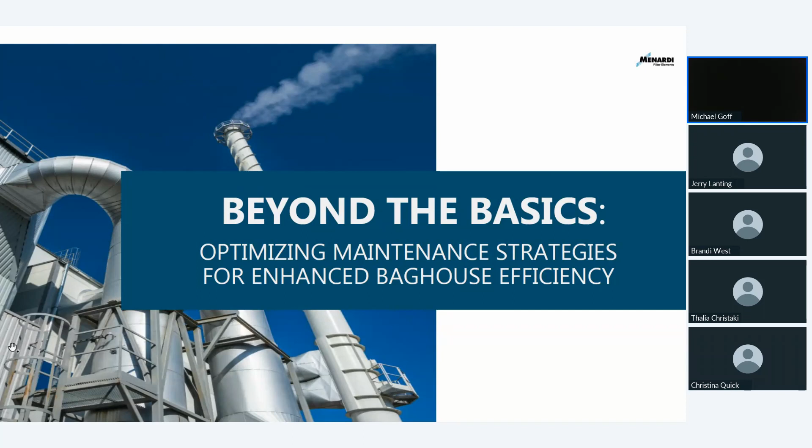Our goal is to give you some of our ideas surrounding maintenance, design, troubleshooting, and strategies that you're able to take back and use every day to help you, A, understand your systems better, B, the role of preventive or predictive maintenance, how those things differ, different troubleshooting strategies and documents to help you take watch of that, and just overall to make things more predictable for you.

We'll spend some time going over this type of content through the slide presentation and some pictures, and then we'll round this out with some of Jerry's case studies that highlight some real-world applications of some of the things we're going to be talking about. So with that, I'm going to turn it over to Mr. Jerry. Thank you.

Hey, thanks, Michael. Like Michael said, my name is Jerry Lanting. I'm one of the senior regional sales managers with Menardi. This webinar is called Beyond the Basics, but I don't think we can really talk about things beyond the basics without at least touching base on some of the basic parts of the baghouse and filters and things like that. So I just want to run through these, take a few minutes and go over some of them.

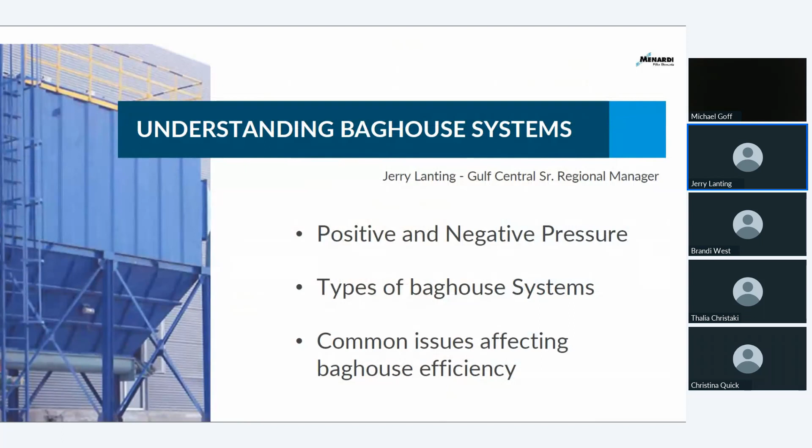The first and the least common when it comes to the fan is your positive pressure baghouse. This is a baghouse where your fan is on the clean side or the dirty side of the baghouse, somewhere between your pickup points and the baghouse, somewhere in the ductwork. It pulls the air from the pickup points and then forces it through the bags, through the filters, and out the stack.

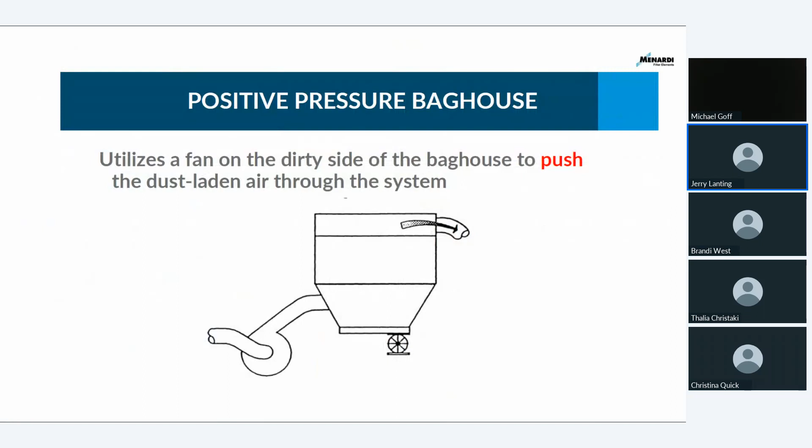The next one is the negative pressure baghouse. This is the most common. This is what I've seen out in the field probably 95% of the time, actually probably more than that. It's where the fan is on the clean side of the baghouse. It is drawing air, pulling air all the way from the pickup points to the baghouse, through the filters, out the inlet, out the outlet, and then pushes it through the stack.

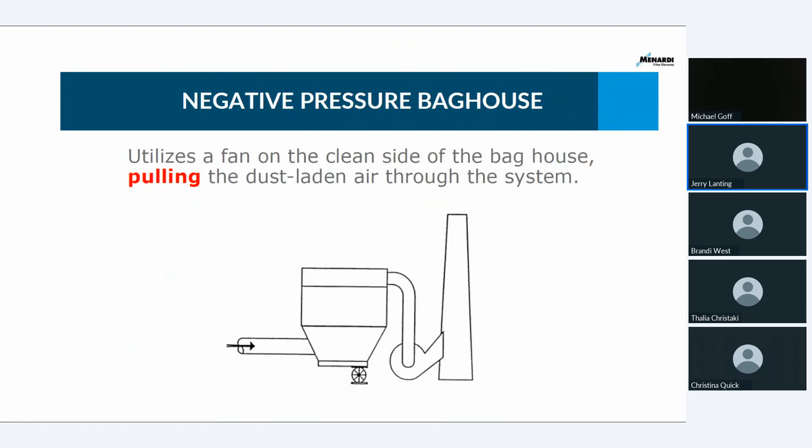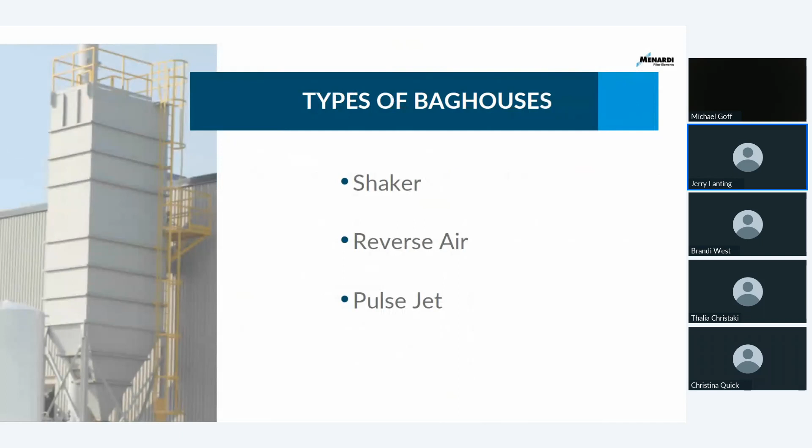Christy mentioned earlier that we're going to have a few polling questions throughout this webinar. The first one is: what type of baghouse or baghouses do you have at your plant? If y'all can answer that, it helps us get more information from you and how we can better serve you. But as you're answering that, let's talk about the three types of baghouses.

Each of those baghouses is named after the way that they clean. The first one is a shaker baghouse, not very common. It's an older style as far as large shaker baghouses go. You do still see some newer shaker baghouses, but it's really in the oil and gas industries or little bin vents, with 15 to 48 filters per each one, just small.

As far as the large collectors, shaker baghouses are old technology, and you just don't see much of them out there anymore. But just a little bit about these: the inlet gas comes in either in the hopper. Your tube sheet is low. The bags are attached to the tube sheet at the bottom, just above the hopper, and hang from the top. The inside of the bag is your dirty side, and the outside is your clean side. You isolate the compartments, and it shakes. The bags relax, they shake. Dirt falls down to the hopper, gets evacuated out of the hopper, then it comes back online.

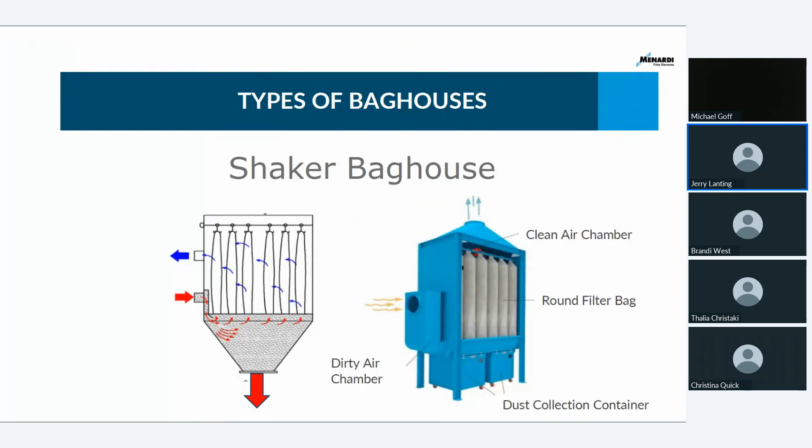The next one is a reverse air baghouse. Same concept as far as tube sheet low. The dirt comes inside, so the dirty side is the inside, the clean side is the outside. It's the exact same structure as the shaker baghouse, with the exception that it cleans differently. You still isolate the compartment, dampers close, bags relax for a moment. The reverse air fan comes on, the bags suck in, and then relax again. The product falls down to the hopper, it comes back online, and then you're good to go.

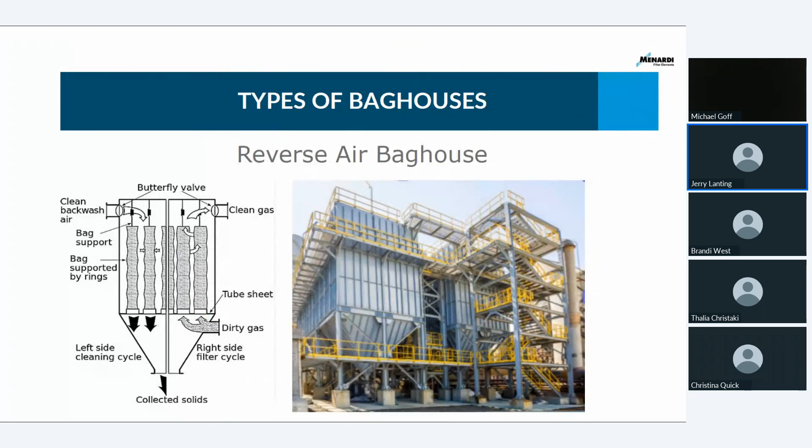The next one is the pulse jet. Now, the reverse air and the shaker are still old technology. You don't see those anymore. Nobody's going to go out and buy and build a new reverse air baghouse. They're all going to be pulse jets. The reason being is the shaker and the reverse air all have to go offline to clean. The pulse jet baghouse is the baghouse where you don't have to do that. It's continuous cleaning. It cleans while it's running.

So it kind of looks the same sometimes. You have the dirty air still coming in at the hopper, comes up, but the tube sheet's up high and the bags hang low, and the outside of the bag is your dirty side and the inside is the clean side. These are cleaned with compressed air, usually blow tubes above each of the holes of the filters, pulsing air. There are some different styles, like a plenum pulse, where it's one big push of air through there, but the bags themselves are being cleaned with compressed air.

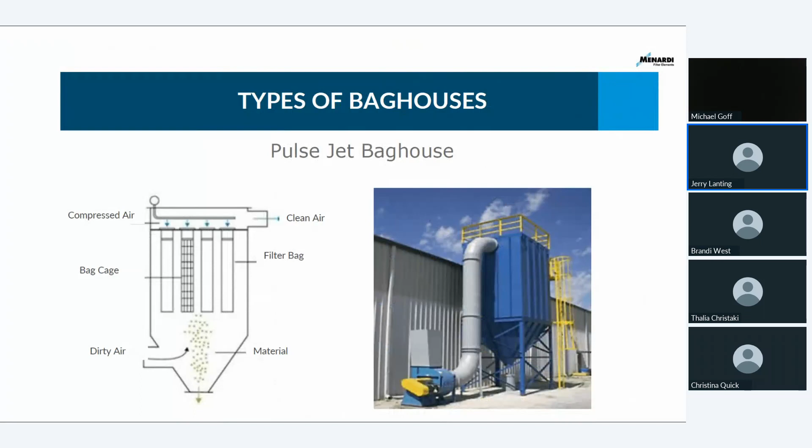So those are the three different types. Again, they're all named by how they're cleaned. Common issues affecting efficiency: there are so many different things that cause your baghouse not to run or work properly, or cause premature bag failure. You see this picture right here where you see some broken wires on a cage. A broken wire on a cage is not your friend.

As your bags are being cleaned, as it pulses, that bag expands, that filter expands and contracts. And what is it going to do? It's going to rub on that broken wire. It's going to cause a hole. You get a hole in your bag. You start introducing product onto the clean side of your tube sheet, and then it pushes product onto the inside of other bags surrounding that. Before you know it, you have an entire compartment or baghouse with compromised bags.

So these are things to look for, such as motor failure. The other one is that center picture - there's a lot going on with this. You have either some abrasion going on, and you're busting out the bottom. There's a lot of different things that could cause abrasions, or it could be heat related. You see the bags where the media is kind of folded up - that's usually a sign of heat. So are you using the correct bag in your baghouse?

These are all things that we can help you with as we're out in the field. Also, the other slide shows cracks in your ductwork. If your plant is in an area where you have high moisture content, those things are not your friend. Your fan is going to pull that moisture in, and we've got some case studies where I'm going to talk a little bit about that in a little while - real life things that we were able to see.

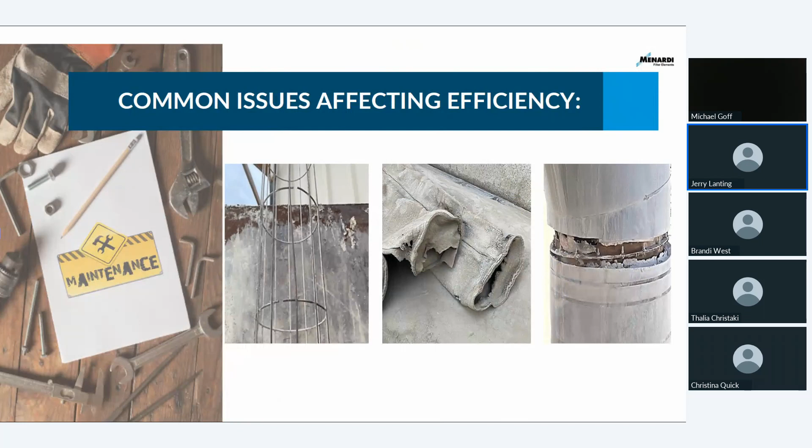Door seals again. If your doors are not sealed on your bag houses, especially if you live in an area with a lot of humidity or moisture present, you're going to pull that into your bag house, and it's going to cause premature bag failures.

Holes again. There's another picture with a hole in the ductwork on an inlet coming in. That's sucking moisture right in.

Your equipment, magnehelic gauges or photohelic gauges, or any kind of sensors that are in your bag houses—knowing that those things work and are working properly is key. I tell people all the time, your bag house is only going to run as good as your equipment is, and understanding what you have and what your equipment is supposed to do will give you a better fighting chance on your bags.

Another thing I preach all the time when it comes to some of your older plants out there: when your plant was built 40 years ago, it was designed to do X amount of product per day, per hour, however you want to look at it. Well, as most of y'all know, that number is now 3, 4, 5, 6 times that expectation, but with the same equipment you had—they didn't upgrade it. You're stuck with the equipment that you have. So understanding all the parts of your equipment, all the working things of it, to give you max output and performance out of your bag house is very, very important.

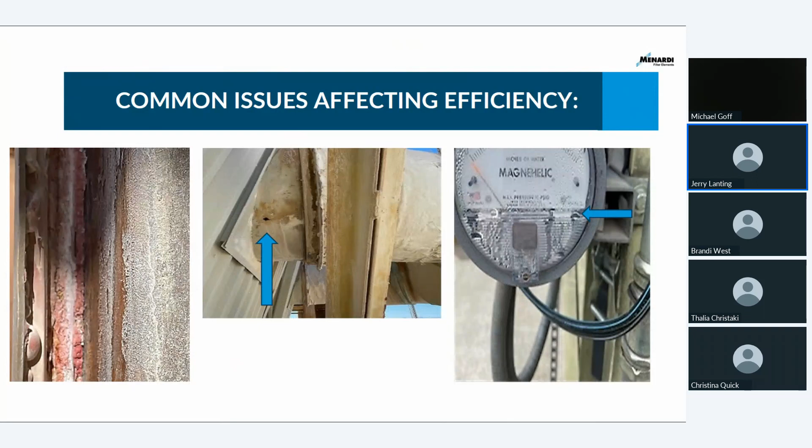Preventive maintenance practices, guys. There's a lot of charts and documentation you can do—regular inspections and cleaning, and the importance of proper documentation.

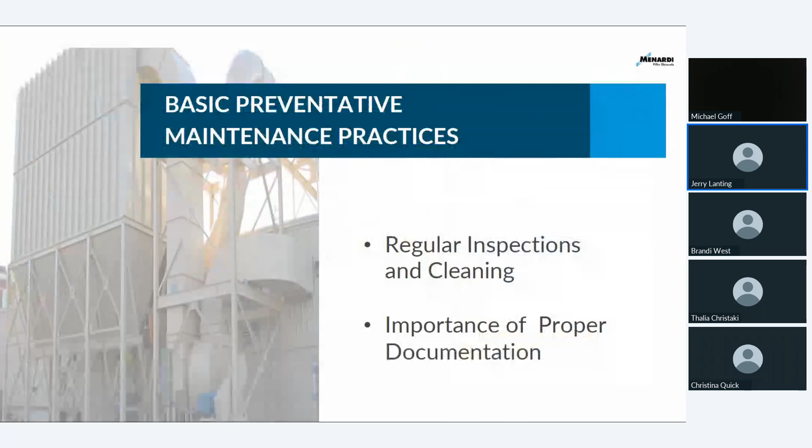So these are some of the checklists that we have, our recommendations. I tell people all the time, I can give you these recommendations and share these things with you, but you need to take what we recommend and apply it to what your plant needs, because everybody's different. Everybody needs to look at different things, but these are just kind of general rules.

So you've got daily inspections—walking through the baghouse area, checking for normal and abnormal visual and audible sounds. That's a crucial thing, right? Knowing and understanding what a failed diaphragm sounds like. If you know what that sounds like as you're walking through the plant, you may be headed to the opposite side, but you walk by a baghouse and hear that sound, you call someone on the radio and say, hey, this baghouse has a failed diaphragm on your pulsing system, it needs to be changed out. Somebody can get there and change that out, making your baghouse run the way it needs to run.

Check your differential pressure, understanding what that looks like. If differential pressure is climbing and that's abnormal, that means you probably have some failed bags in there somewhere that are plugged up and you're not getting the flow that you need. Checking your cleaning cycle, making sure—there's just a lot of different things.

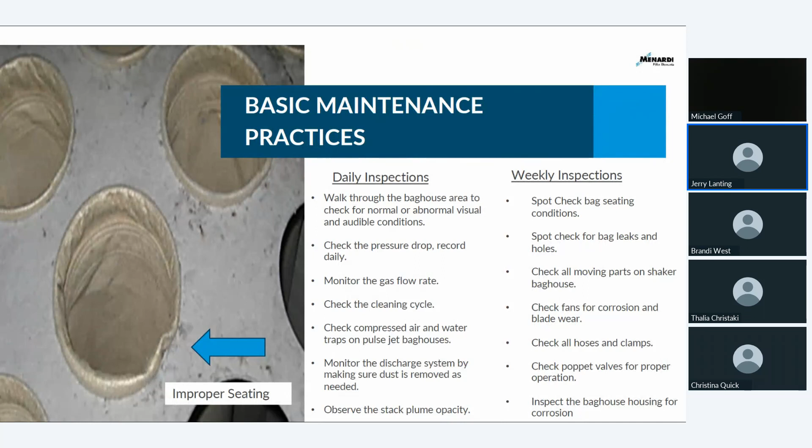Blow out clear magnehelic gauge lines, verify the working order of the temperature-indicating equipment, make sure your temperatures are indicating correctly. That's very important because, as a lot of y'all know, you put in certain media in your bag house based off the conditions of your bag house, and temperature is a big factor.

Check the bag cleaning sequence to make sure those are correct. If you are not sure how your cleaning sequence is supposed to be, let us know. We would be more than happy to come out on site and make sure you are cleaning properly.

And then you've got quarterly inspections: thoroughly inspect all bags, do a leak check if you can, calibrate the opacity monitors. There's a list that goes on and on. Check the rotary airlocks, the screw conveyors, and we're going to talk a little bit about some case studies when it comes to things like that, and why it's important to check those quite often.

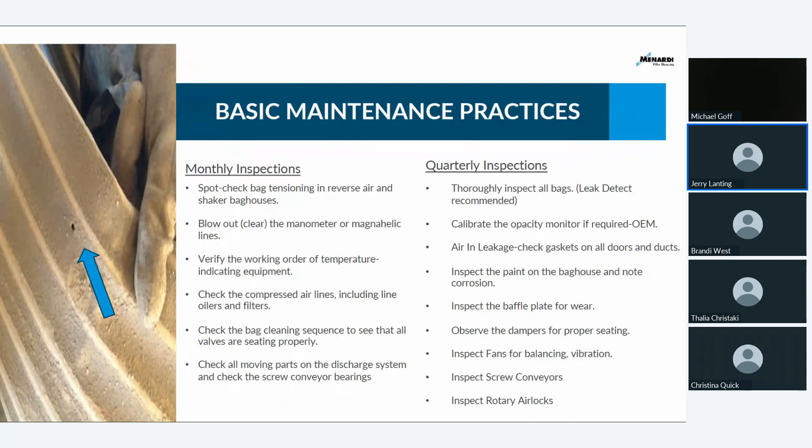And then here's some yearly inspections. These kind of get really deep into the woods, like check the bolts, make sure those are good, check the ducts for dust buildup.

And if you don't want to climb through your duct work to make sure there's buildup, I can send Michael Goff, my manager, out there—he'll climb through your ducts and clean them for you. Just joking. Just check everything for proper wear.

Check your hoppers, make sure those are good. Your sonic horns, make sure those are working correctly. If you are curious what sonic horns are, please reach out to us. We can help explain what sonic horns are and if that could be a good fit for your plant.

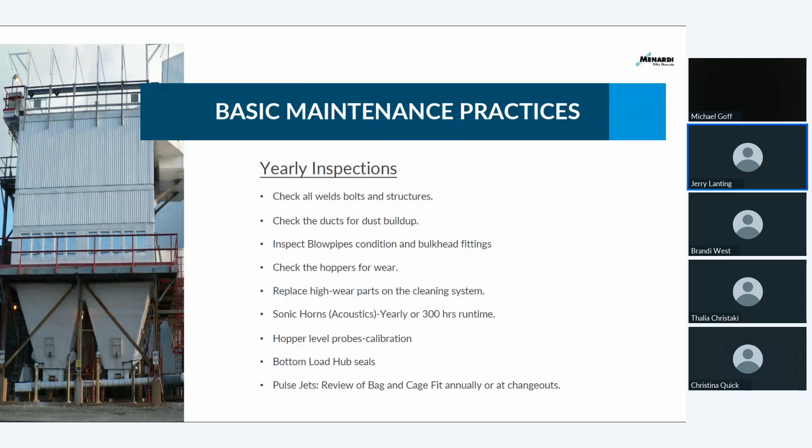So there are several things that we use, documentation forms to help understand what you have and what's been problematic. We have a bag house inspection report that we do when we go on site.

We have a failed bag location chart. That's very important—knowing if you constantly are having bags fail in a compartment, document which ones they are, and that could tell us and tell yourself that you have a problem in this area. If it's random, then it's random, and then we find out what your other mode of failure is.

Then we have what we call our FITS form. These are forms that we use on site to measure bags, cages, pleated filters, whatever your equipment is, so we can make sure we get you the best possible filter that fits correctly in your plant.

We don't just take your word for what it is. A lot of the time we want to get on site, measure a tube sheet, mic the tube sheet hole, make sure that snap band is fitting in there correctly—not necessarily just that it pops in really easy, but that it pops in easy and it seals, so you don't have any bypass and catastrophic failures within your bag house.

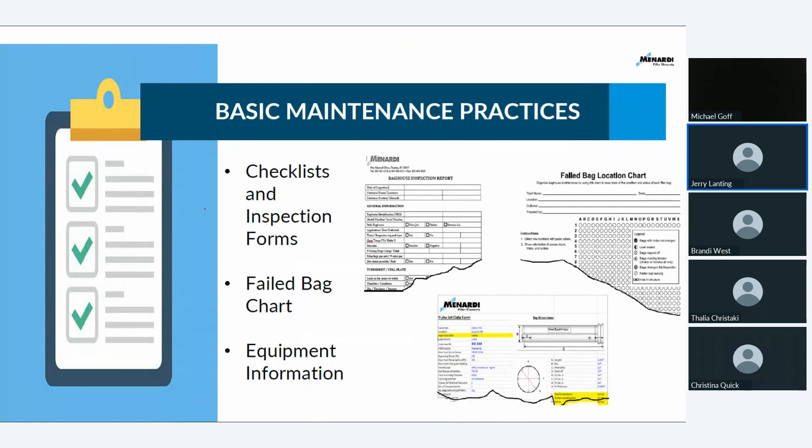So all the checks in the world don't matter if you don't keep track of them. So with that being said, I'm going to turn this back over to Michael, and he's going to talk about some more stuff.

On the heels of all these basic maintenance practices we've been talking about so far this morning, I'll be talking about some more advanced maintenance topics—just quickly covering predictive maintenance, how that might differ from preventative maintenance, equipment upgrades, filter construction, and how empowering your personnel through encouraging ownership and accountability of the equipment may help you with reliability.

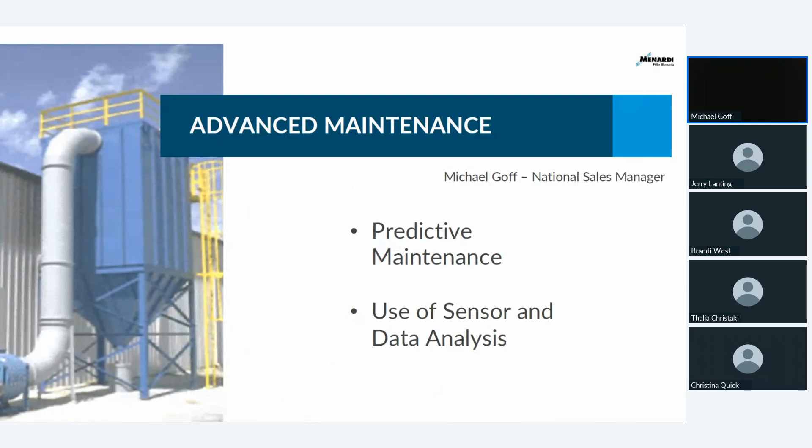On this first slide, we're looking at tension and how that plays a role both from a preventative standpoint and predictive. This is primarily involving reverse air and shaker collectors.

So of note is we expect that tension should change over time. You guys that have reverse air and shaker bag houses know everything there is to know about initial tension requirements when installing these bags, and those of you that have hardware know what that spring load design is, cleaning systems, et cetera. But the tension that changes, and how that changes, will help you determine or predict what that life cycle might be according to those changes.

So when you're looking at the picture on the right, this is a good visual check, assuming the rings are all designed to be in the same place. Crack open the door and see if that ring placement has changed. Fifth bag back from the wall, the rings are 2 inches lower than everybody else—let's go up top and see what the spring looks like.

So these things are going to move, they're designed to move. The predictive side of this is, if we do everything we can from an initial loading standpoint and preventive maintenance, how are those bags that are a little bit less tensioned going to show up in overall bag life?

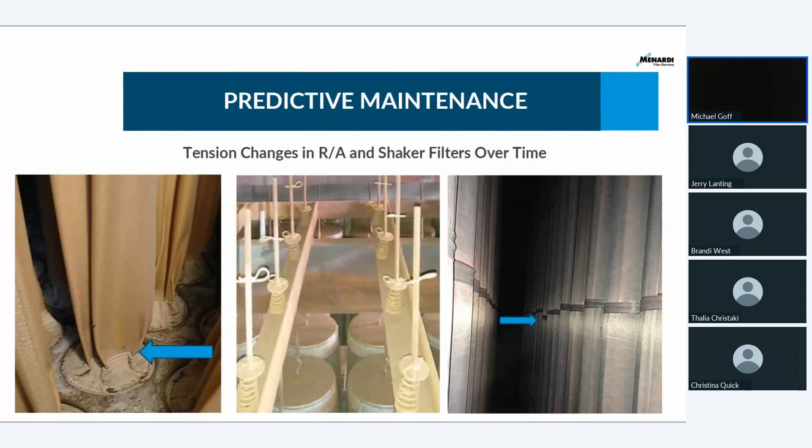Differential pressure. Everybody's got differential pressure, whether it's compartment by compartment or flange to flange on an entire collector. But this is the heartbeat of your system. This tells us how healthy we are. You have to be able to clean if you're going to have a multi-cycle filter system, but more importantly, you have to be able to trust that your instrumentation is giving you the right information.

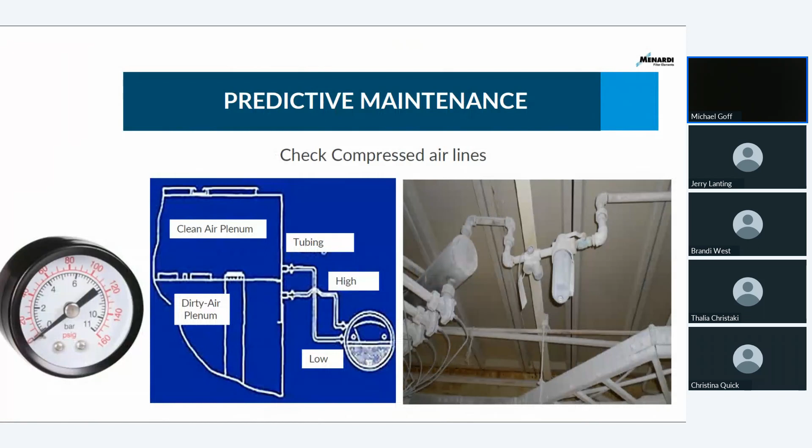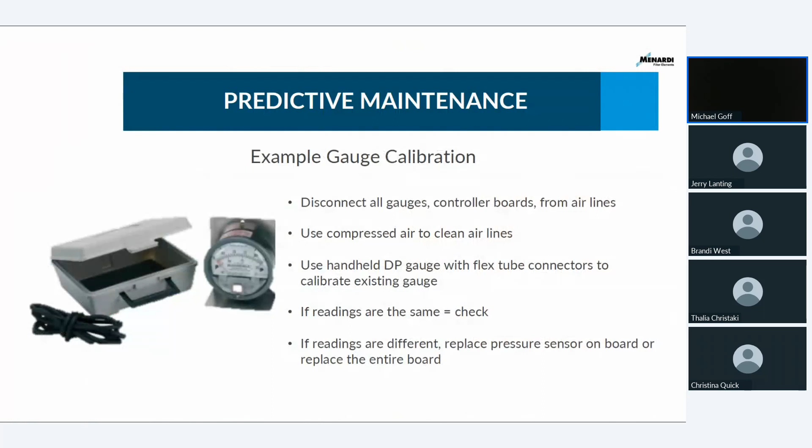So this next slide is going to give you an example of how you might manually calibrate to ensure that what information you're being given is accurate. This would walk you through the process of manually verifying that the information is accurate. It includes cleaning out the airlines and just kind of double checking.

From a predictive maintenance standpoint, again, cleaning on demand versus cleaning on time. I'm not going to go into this a lot because this is in some of Jerry's case studies at the end of this presentation. But I will just mention to pay careful attention to those set points. Where's the high end, the low end, and what is that gap between? Cleaning on demand versus on time is heavily involved in predictive maintenance and total cost of ownership. So those are the reasons that drive somebody to move from continuous cleaning versus clean on demand.

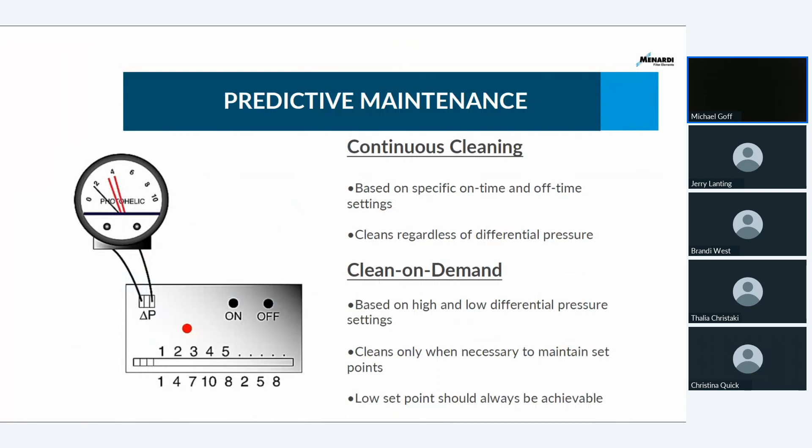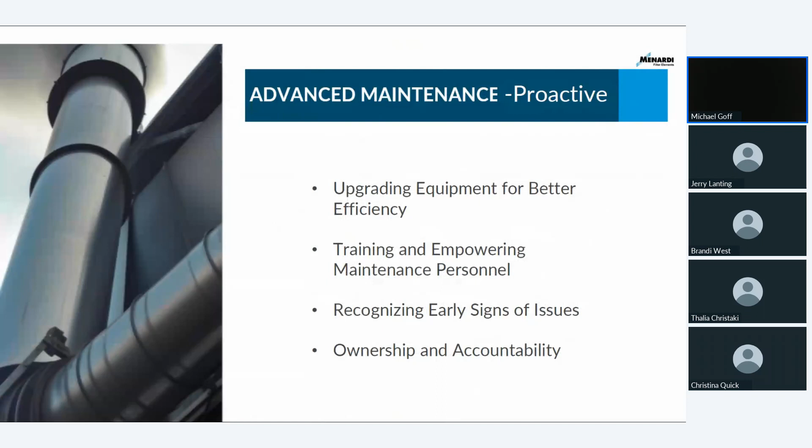All right, this next section, we start talking about equipment changes or filter changes that you might not have considered that may help with your reliability. We'll also talk about those unintended consequences sometimes of upgrades and how empowering your maintenance personnel might help you with reliability as well. And I'm gonna steal a phrase here from Department of Homeland Security: if you see something, say something.

So this next slide is all about equipment upgrades. In some sense, filtration equipment can feel like buying a computer. They used to say that as soon as you bought a computer, it's already out of date. And what you're looking at here was something that was probably cutting edge technology of its time. This is a flat flange seal, and this is just a picture to illustrate there could be a better way to seal this, both from an emission standpoint and a change-out, labor standpoint.

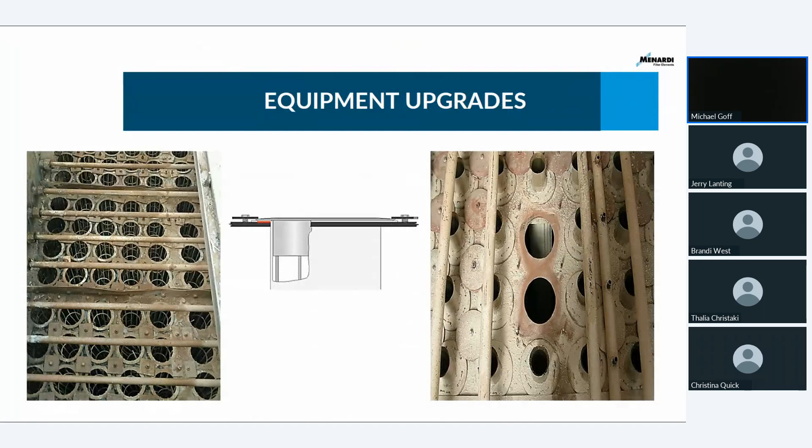These next few slides, we'll talk about filter changes. This first one is a bottom load filter. This dominates the air pollution control industry. Everybody's got a bottom load filter out there somewhere. That's a raw edge bag that you attach to a cage, and then attach that combo to a bottom hub with use of a hose clamp, some type of clamping system. You see the picture there to the left. If the bag is either not sized properly, or it's a heavy bag material, sometimes you can get some pinch points in there that can cause some emission issues. So a potential filter upgrade to help combat that is what we call a soft seal, where that top section that is meant to tuck into the cage is made from a little bit different material to help you create a better seal when you attach it to the hub.

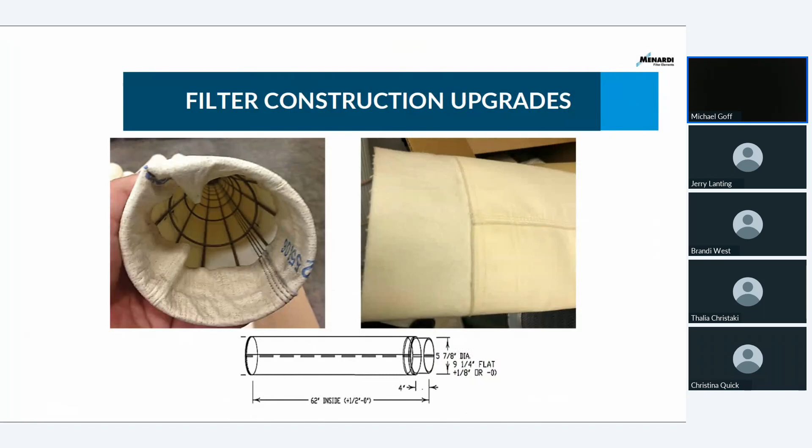The next one, again, kind of a similar story. This is a compression fit that uses a clamping system, clamping to a flange. You see that middle picture there. That is a bag that has a piece of material that is meant to sandwich between that metal cage and that flange there. So that's heavily dependent on is the clamp doing the right amount of work? Is the personnel putting the clamp in the right place? There's a lot of factors involved there. So that picture to the left is just another design, another way to skin that cat to get you a better seal and better reliability in your equipment.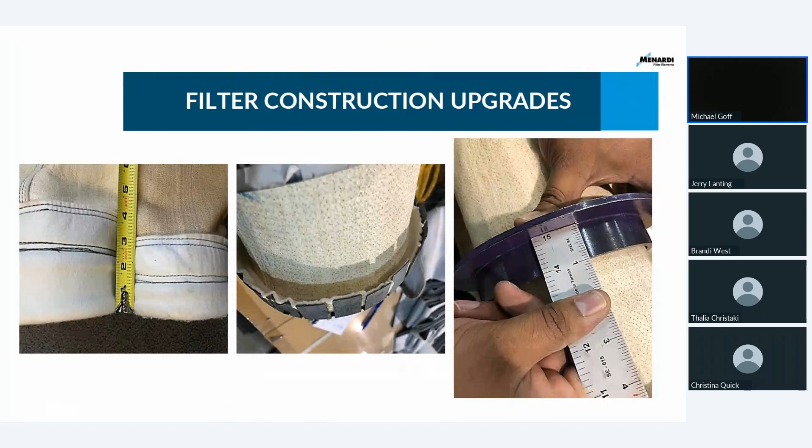Twist lock - Jerry's going to talk a lot about this. This is MikroPul, Aeropulse specific technology, and it's kind of a hybrid between a bottom load and a top load. Those of you familiar with bag houses are using bottom load technology, bag tucked into cage with clamp, but attaching that to a venturi and then feeding it into the top. So you've got a lot of moving pieces here, a lot of variability and a lot of maintenance involved in getting these things sealed up. There's another way to go about this, and Jerry will go into more detail on that a little bit later.

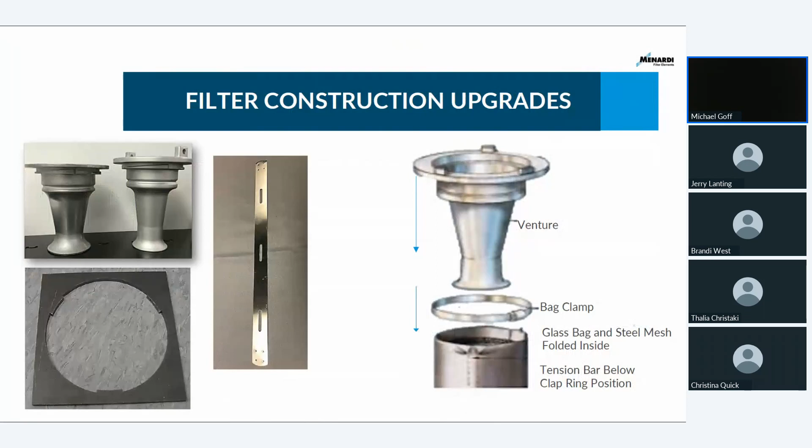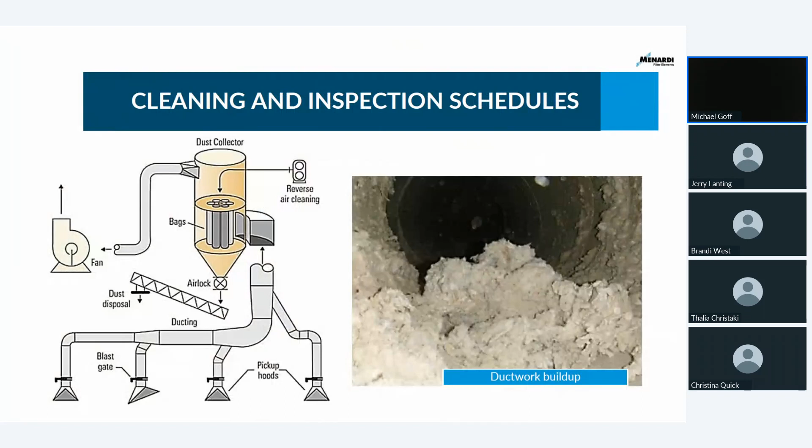We talked a little earlier about unintended consequences, and this is just a picture to illustrate that. Filters, timer boards, and cages are some of the common things we look at from a preventive maintenance perspective, and hopefully what we work on preventively helps us predictively determine how long those life cycles are going to last. This is one of those unintended consequences where, hey, let's just add a couple more pickup points - what could possibly hurt? We've got some extra fan, or we upgraded the fan. Just know that everything from grain loading and bulk density gets affected by your extra pickup points and dilution air, things like that. So just something else for you guys to consider.

While you're looking at bags and cages, please add blowpipes to your cleaning inspections. Blowpipes are specific to PulseJet technology. That's not something you need to check every month or every year, but maybe every change out or every other change out. The holes on the blowpipes need to be round and centered over the bag and cage, so that when it goes through a cleaning cycle, all that energy goes into the bag and not directed somewhere else.

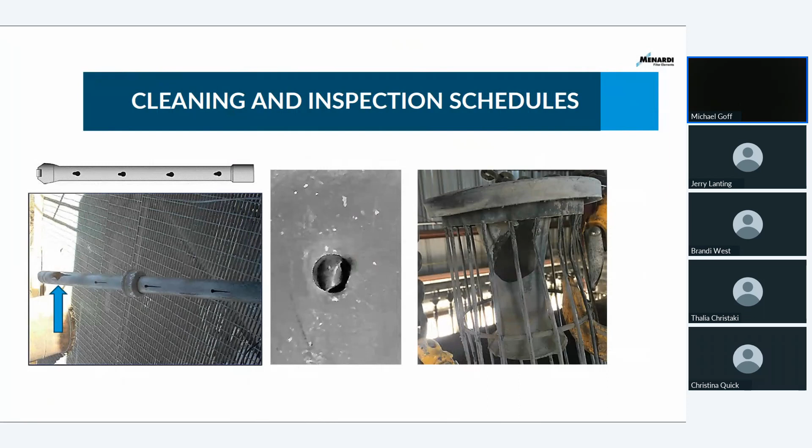So this is one of those see something, say something moments. If a catwalk is broken, you know it shouldn't be, and you see some cracks in places they shouldn't be, let's say something and get that fixed, because you can never tell what one little problem can manifest inside the bag house.

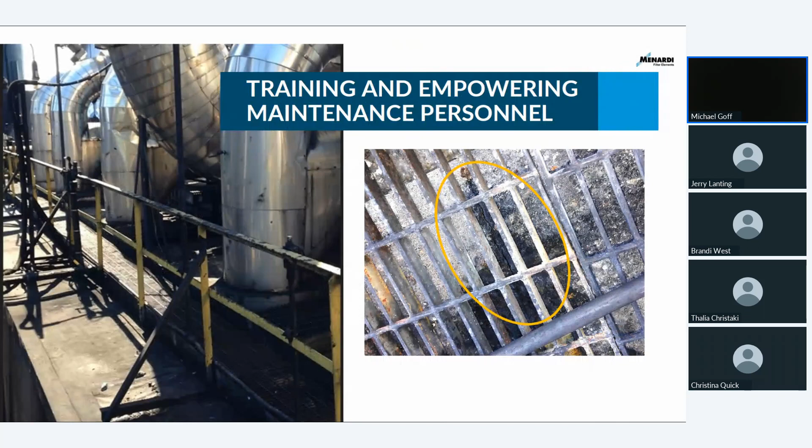So the picture you're looking at here is air and particulate hitting a baffle plate, wearing out a piece of metal. You can see that missing section there. And lo and behold, if it's going to eat through metal, you see the bags there where it's eating right through the media. So add baffle plates to your preventive maintenance.

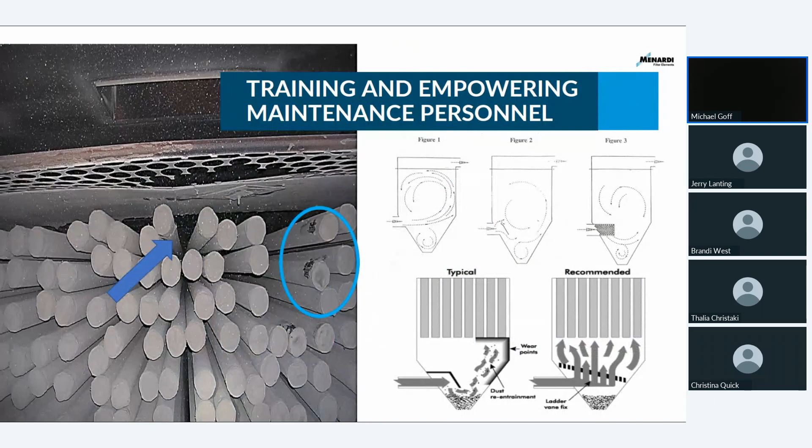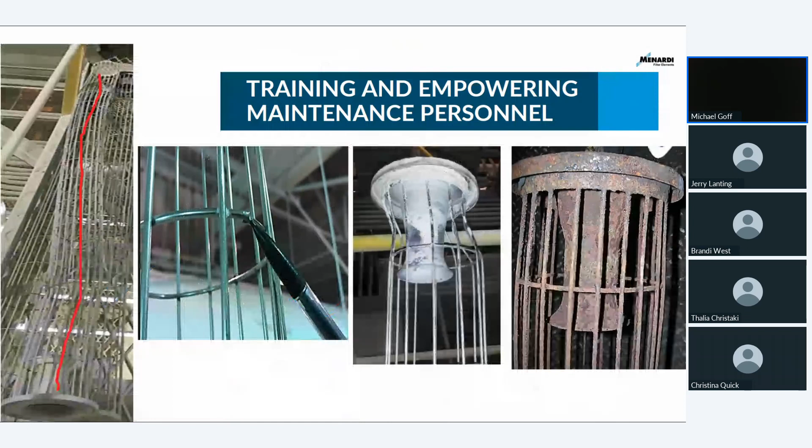Cages, kind of a fun one. Everybody's, at least in pulse jets, has some bent cages out there for sure. Preventive maintenance. But if they're a little bent, sure, bend them back. The picture on the left is a little drastic, and the middle picture even more. Jerry would say it's got scoliosis. But if we got any broken welds or rust, that's a non-starter. Let's not try to reuse those.

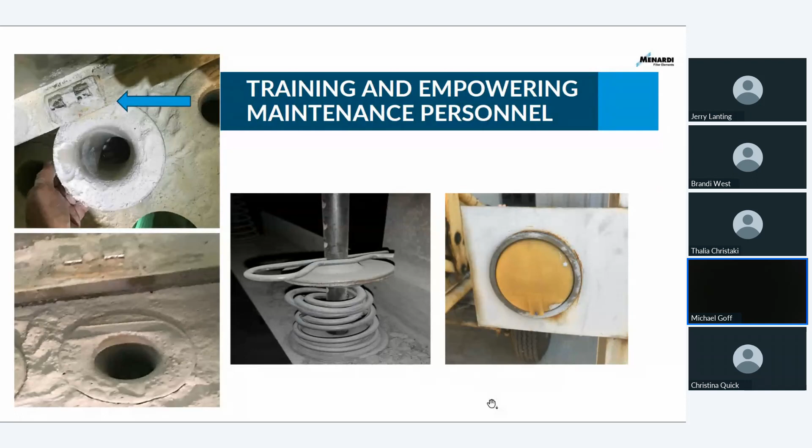Last slide is a little bit specific to pleated filters, but it can be applicable to some bottom load bag and cage filters. Clamps, they get reused. Bags and cages, it's very common. And these are stainless steel, and in a lot of cases, it doesn't cause an issue. I only put this in here to illustrate line clamps, why they can be important, why you would use them.

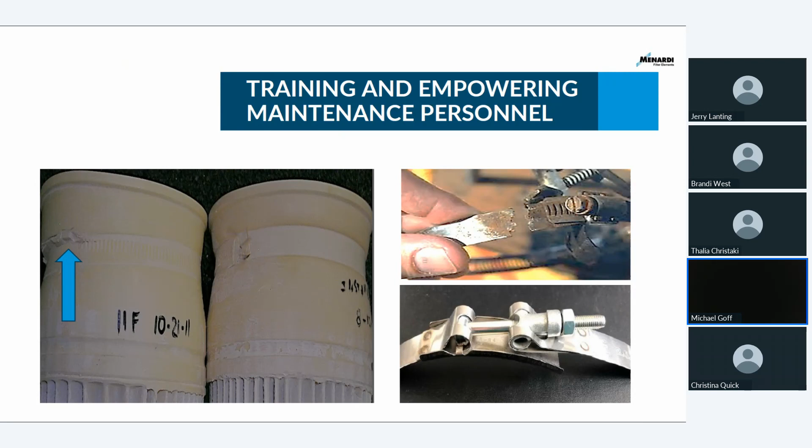Pleated filters have a boot that is meant to marry to the bottom hub of a bottom load baghouse system. I liken these boots to kind of like a banana. The banana peel is really tough, the inside is kind of squishy and delicate. The skin on these boots is just the same. As long as we don't cut that skin on the outside of the pleated filter boot, we're in good shape. So we want to limit any sharp objects, any corroded metal that will cut that skin, because once a cut starts, it will unravel and you'll have problems with these things dropping out. Line clamps are a great way to combat that.

With that, I'm going to turn it back over to Jerry, and he's going to go through some case studies.

Thanks, Michael, for that. Again, we'd like to apologize for the technical difficulties. Technology is great when it works, but not so great when it doesn't work. So thank God I'm not in charge of the technology of this presentation, because y'all wouldn't be able to see this from the beginning. So anyway, we apologize. But let's get to the case studies, right?

So these case studies I'm going to talk about are things that over the last 6 or so years I have physically seen with my own eyes, and helped assist some of our customers with issues at their particular plants. From taking what they're telling me was wrong, going out and climbing through their baghouses, looking at their entire system from pickup points to stack, trying to figure out what could be causing these issues and coming up with solutions to help them out. So I just wanted to give you guys a few of these things to let you know how we operate and how we've helped people out in the field.

Talked about this earlier when I was talking about door seal, correct? Door seal is very, very important.

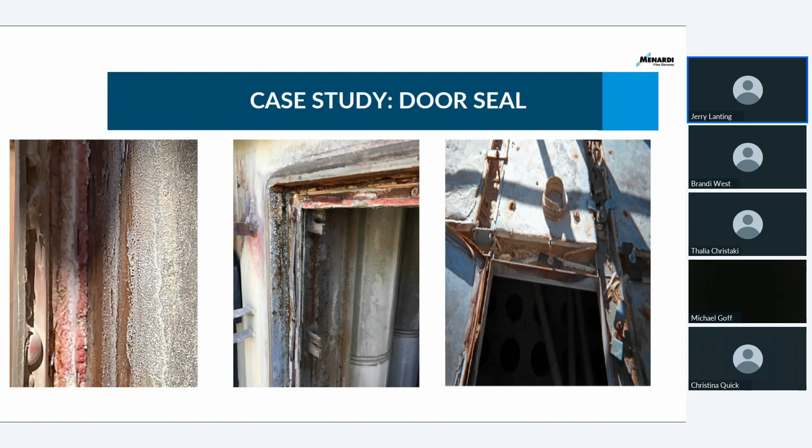This next case study: I got a phone call from a steel plant in Oklahoma. They said bags were popping out of their tube sheet on a reverse air bag house, as well as getting some bypass.

I got on a plane, went out there Thanksgiving week. It worked out because my in-laws live in Texas, so I was able to drive down and eat with them. Anyway, I got on site, opened up the bag house, started looking, pulled out my set of calipers, and mic'd holes in several compartments. What I found was an inconsistency in the size of the holes as I mic'd those.

What they were using was a 10-ounce fiberglass with membrane and a fiberglass cuff, reverse air bags. Since they were not willing to change their tube sheet at the time, and fiberglass doesn't give, we decided to move them. I asked about their temperatures, and they stayed under 350, so I was able to move them to an aramid cuff, which has a little more give to it, so it would seal on those inconsistent holes.

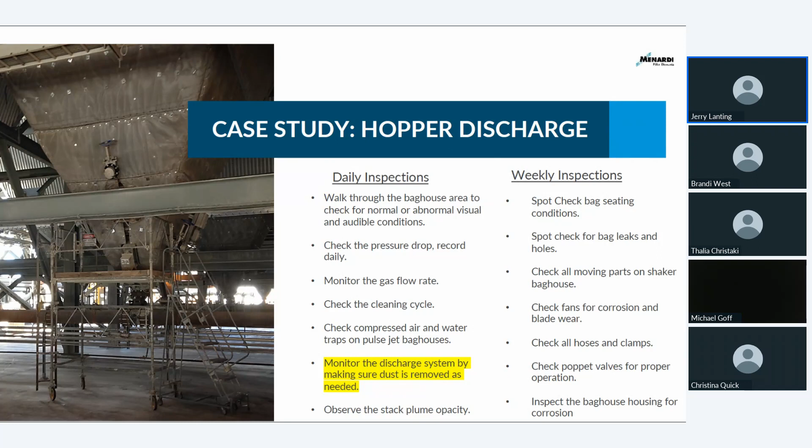The next case study - Michael kind of talked about continuous cleaning and cleaning on demand, and what's the difference between the two. I got called out to do some baghouse training, as well as help them with the installation.

I'll talk about that in a few minutes. But I got called out to do some baghouse training at a gypsum plant in Wyoming several years ago. As I was doing about a 6-hour class on basic baghouse training, I was just telling them the difference between continuous cleaning and cleaning on demand. And as we were doing the baghouse inspections, walking around looking, we noticed that all of their cleaning systems was set up as continuous cleaning.

We also looked at their differential pressure in those baghouses, and it was extremely low. So I told them, you're probably over cleaning your bags. You're probably cleaning too often. And you say, well, what's the problem with that? Well, compressed air costs money.

That is a big expense, and the more you can save on compressed air, the better. Every time you pulse, every time that compressor fires up and you use that pulsing system, you wear out diaphragms. You take the risk of oils or dirt or water getting in your compressed air lines. And each bag, the more you pulse it, because that bag flexes and comes back, it does weaken the bag.

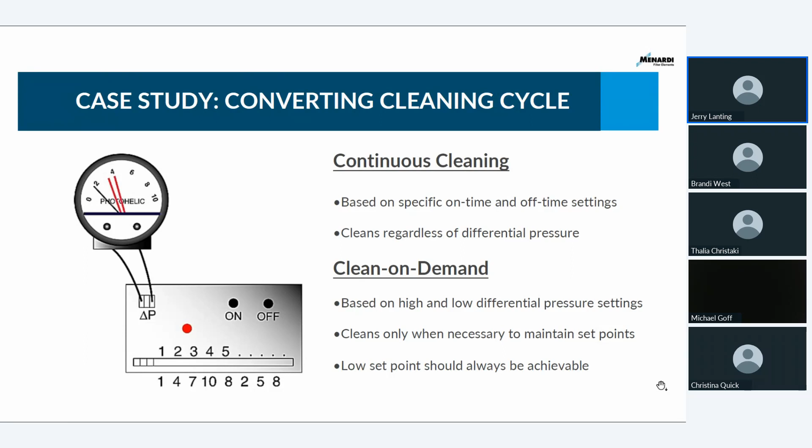Sorry, guys. We're getting there. All right, this next slide...

So the first thing they did is they sent me a bag, and me and my technical manager started looking through that bag, and this aramid you can just pull apart with your fingers. It's like it was paper. So that immediately tells me two things. One, it tells me that it was compromised somehow, and it was compromised one of two ways.

It was either compromised by heat, but we didn't really see the evidence of that, so we really leaned towards hydrolysis. Aramid does not like moist heat, it doesn't. So I called the customer and said, hey look, we believe hydrolysis is going on within this baghouse, what is your moisture content? First of all, I asked about how the baghouse was, where it was located, whatever.

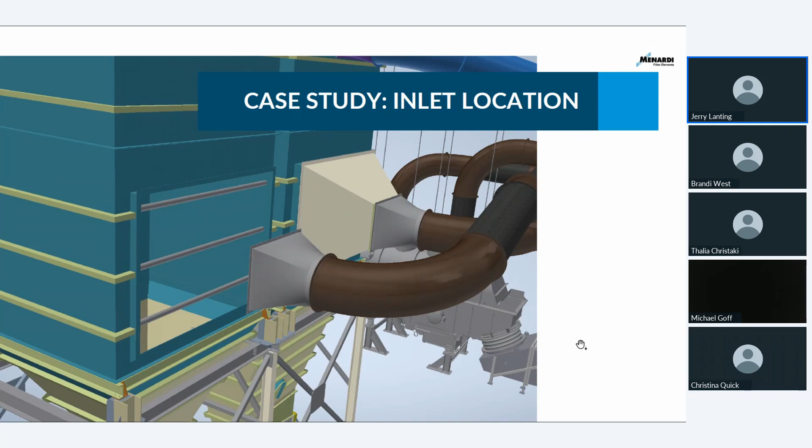Michael talked about this snap band earlier, the slotted snap band. I mentioned earlier about that gypsum plant in Wyoming. One of the things I did there is they asked me to help them do a change out. What they had was a MikroPul twist lock bag house. For any of y'all that know what those are, like Michael said earlier, it's a top load design that's kind of like a bottom load.

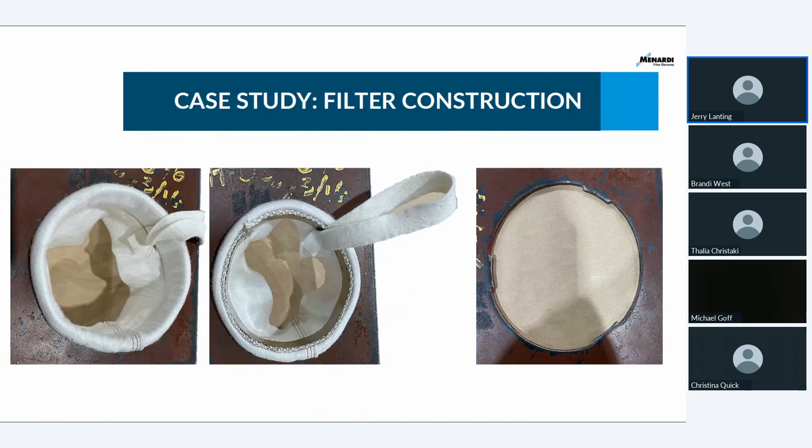So I'm going to go through the steps it takes to change out a bag on a standard MikroPul twist lock. You take a tool, you untwist the venturi sitting on top of the tube sheet, you pull it up. There's a hose clamp, a worm gear clamp in there. You unscrew that and get it loose. You pop out the venturi, which is locked in there by a bead. You pop that out, move it to the side. You take the bag, undress it off of the cage.

Then you do the exact reverse. You take the cage, you take a bag, you slide the cage in, fold the bag inside the cage making sure there's no wrinkles, put the worm gear clamp back on, pop the venturi in, take a drill and tighten up the worm gear clamp. Then you go up top, take a gasket, slide it on top of the bag, drop it down into the hole in the tube sheet, and twist it in there. You have to use a tool to make sure you torque it correctly and it's twisted in. All those steps just to change out one bag.

So we have what we call our slotted snap band, which actually converts the bag to a standard cage with a built-in venturi, with a regular style DBSB double beaded snap band. So instead of going through all those steps, to change one of these out you pull out that ring, pop out the snap band, pull out your cage, pull the bag out, put a new bag in, snap it in, put the ring in, and drop the cage in. It's probably 20 times faster than doing a MikroPul twist lock bag.

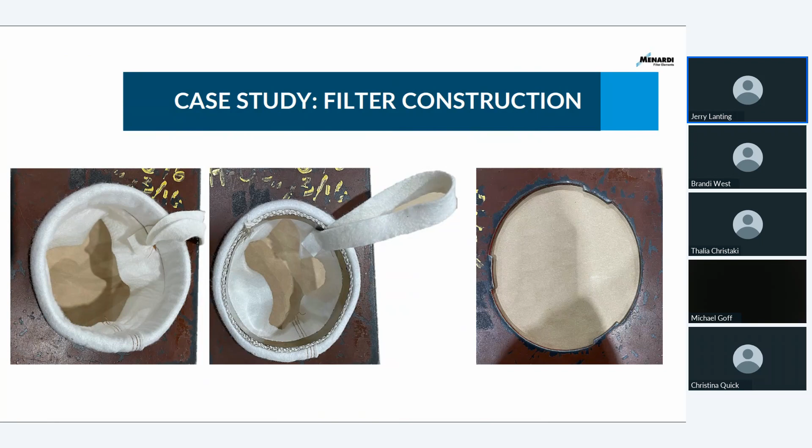I think this is my last one, right? Okay, so this is my last case study. Same steel plant in Oklahoma. They have a bag house off of one of their burners.

And they called me up and said, hey man, we're getting a lot of holes in these bags. They were already in a high temp bag, a fiberglass with membrane bag, but they were getting little burn holes in their bags. So I started asking questions, and I said, you've got embers coming in, flying, landing on your bags and causing holes. These are burn holes, I said, you need to stop that. And they said, well, we don't know how to stop that because we can't control what people throw in this burner. There's all kind of different things, people say they throw trash in there, pallets in there. There's all kind of stuff they'll just throw in this burner, and they can't control what's coming in.

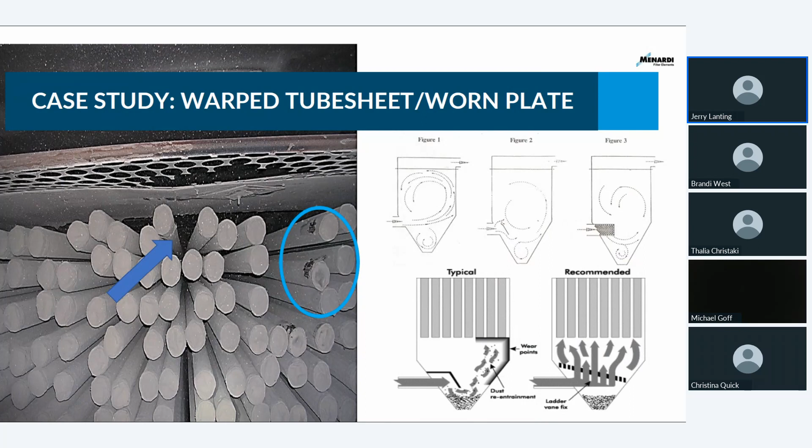And sure enough, they went and changed those out. Problem went away. Again, I was there last week visiting with these guys, checking on some stuff, and I asked them how those bags were doing, and they said perfect. But he did mention, he goes, it's probably about time for me to go in and check those plates because over time they are going to wear out. But I think that's all I've got as far as the case studies. I'm going to kind of turn this thing back over to Christy.